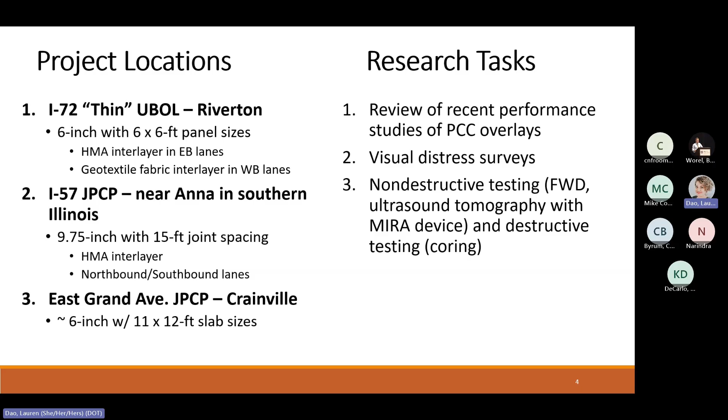Design details for this project: the original pavement was an 8-inch continuously reinforced concrete pavement, built in 1976, so it's 50 years old now. It was constructed with D-cracking susceptible coarse aggregates. D-cracking is a freeze-thaw distress that afflicted many of our early concrete pavements in Illinois.

It had an HMA overlay in 1998, which we milled off prior to doing this new PCC overlay. The overlay itself is an unbonded 6-inch fiber reinforced concrete overlay, using 4 to 5 pounds of synthetic macrofibers. The joint spacing was 6 feet by 6 feet. The eastbound had 1.25 inches of hot mix asphalt interlayer, and the westbound had a geotextile fabric interlayer.

There are no dowels in this pavement since it's only 6 inches thick, making it a little hard to put dowels in. So we're relying on aggregate interlock and maybe a little bit of contribution from the fibers for load transfer.

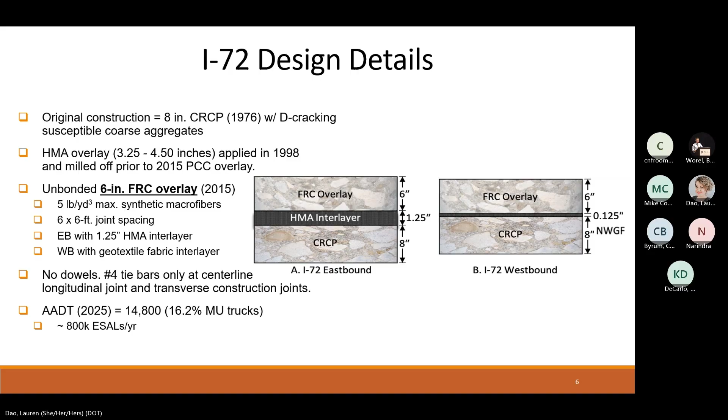A few slides here on the construction sequence for this project. In pre-stage 1, we had to replace the inside shoulder, which was only 6 feet wide and 11 inches thick. For the staging, that shoulder was going to be carrying traffic, so since it was in poor condition, we needed to rebuild and replace that material.

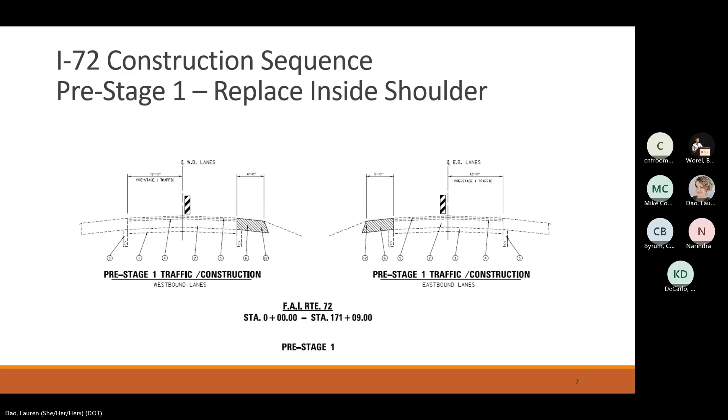For stage 1, we were working the driving lane and the outside shoulder, so traffic was driving in a portion of the passing lane and the inside shoulder. The contractor chose to do the driving lane and the outside shoulder in one operation. If we had done the driving lane and outside shoulder as two separate paving operations, we would have had to use tie bars, since we wouldn't have had the benefit of aggregate interlock - it would have been just a smooth joint. Since that's a solid joint, you kind of count on aggregate interlock once a crack forms.

We did a little bit of repair in the outside shoulder, milling deeper than just the 3 1/4 inch overlay. We removed all the overlay, and the outside shoulder went a little bit deeper to repair some poor material in that area.

After the driving lane and outside shoulder were all done, we came back and paved the passing lane and the inside shoulder again in one operation, just a solid longitudinal joint there with no bars.

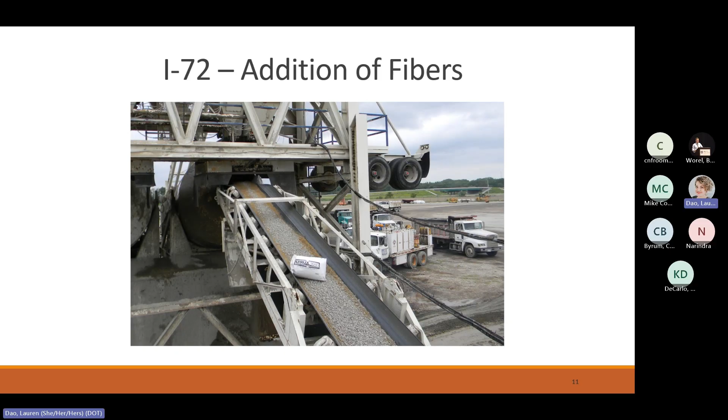Just a photo of the fiber reinforced concrete - you can kind of see the little fibers sticking up in there. That's on the asphalt interlayer material.

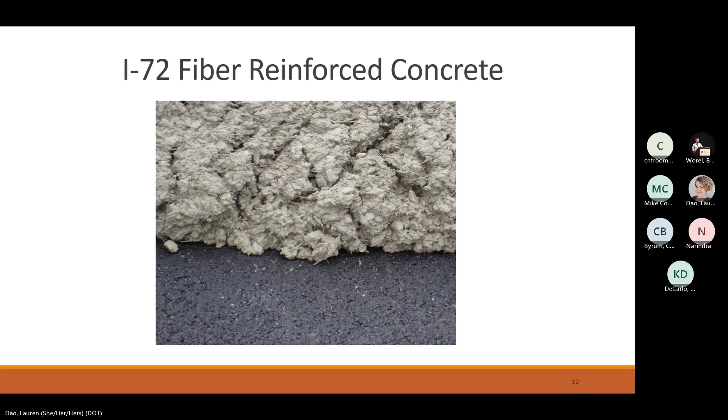At first we had them put it down with washers and nails to try and keep it down. Very shortly they determined that wasn't really going to work because you couldn't keep it tight and it would wrinkle up. Trucks backing material to the paver, and anytime they turn or brake, it would cause the fabric to shift and move around. I think it worked out better once they started using tack coat to secure the fabric.

But still, one of the other things we could do with the asphalt interlayer was correct some cross slope issues that we had. So it's easier material to work with for the contractor, and for design, it was a little bit better for both the district and the contractor.

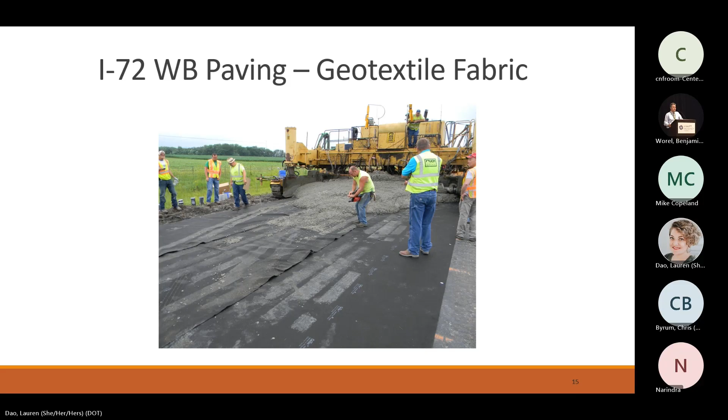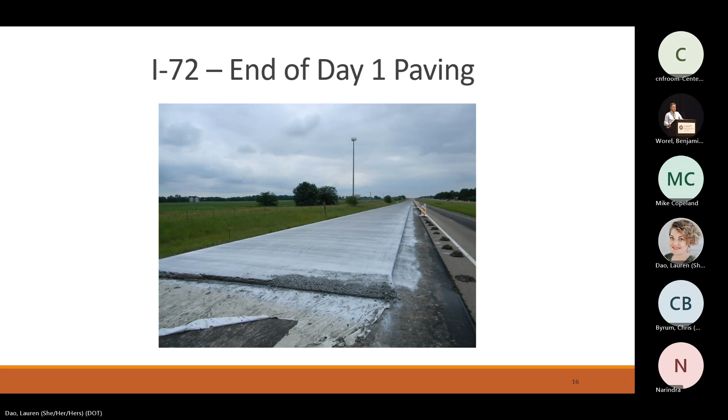The eastbound has some longitudinal cracking that the westbound doesn't have, so that's why it's a little bit lower CRS. I think that one's 7.8, and the other side is 8.1, but those are still in the excellent category for our CRS ranges.

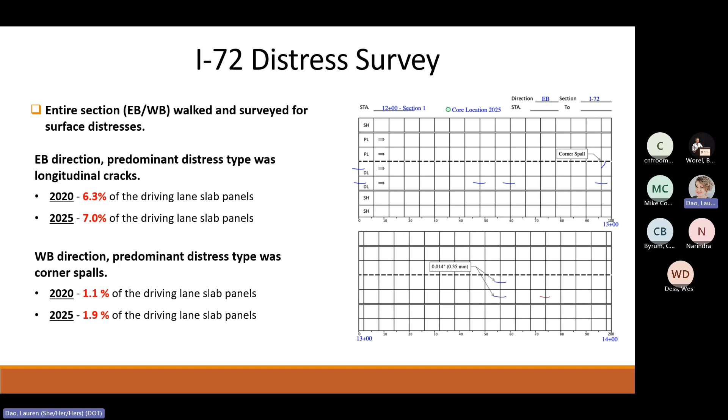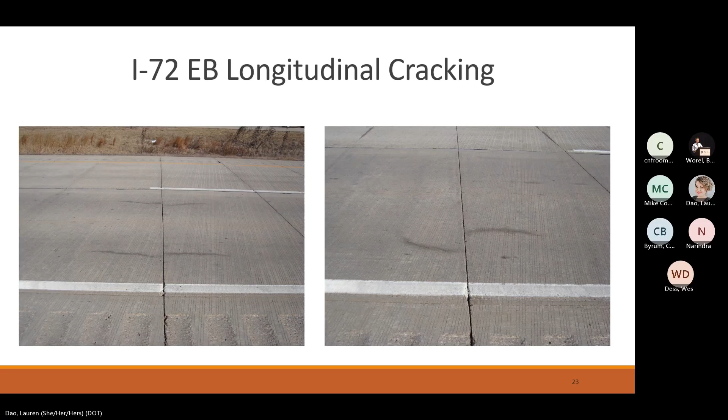So we took cores mid-panel. The HMA was bonded to the concrete in good condition. We took cores 6 inches from the joint. The HMA was bonded and in great condition. Then when we took cores over the joint, particular joints that had that longitudinal crack, you could see that there was a little bit of erosion and stripping in the HMA interlayer, debonding. So you lose just enough support there, causing just enough deflection to sort of initiate that longitudinal crack.

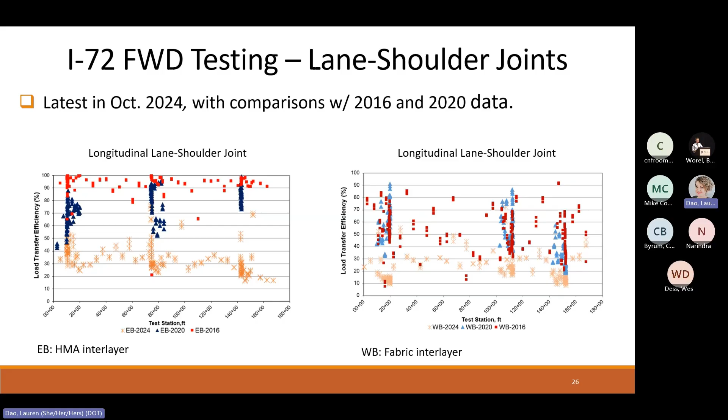Ultrasound tomography with the MIRA device. This is a little shoebox-sized device that we can use to shoot a signal down into the pavement and see how it bounces back. On the westbound, with the fabric, there's kind of a cleaner break between the materials, so you get a stronger signal there at 150, which is a 6-inch thickness. On the side of the asphalt interlayer, the concrete is bonded to that layer, so it gets a little bit fuzzy as far as the reflections coming back, being read by the MIRA device.

This is just showing you can see a much more clear signal on the side of the fabric there on the top than you do on the side of the HMA layer that we're showing on the bottom.

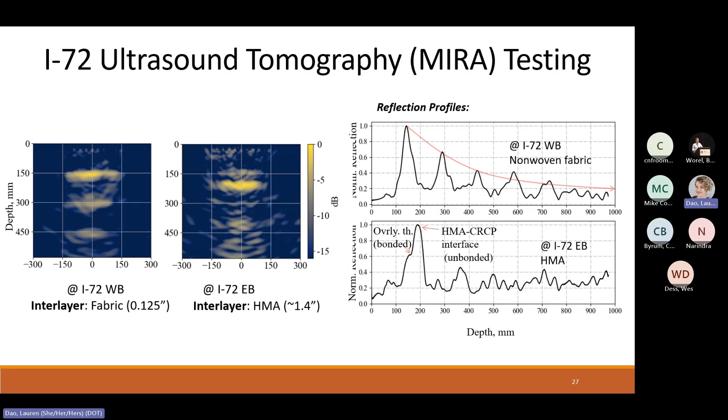We did do a few patches in 2024. The location on the left is a transition panel from asphalt to concrete. That panel cracked within a year after construction. The nice thing with the fiber reinforced concrete is that sometimes even when you do have cracks, the fibers keep the cracks tightly together, so it wasn't a huge performance problem. We kind of let it go for several years before we patched it.

If they had asked me, I would have told them they could have just patched the 6x6 concrete, but they did a full depth patch there, so it's like 6 inches deep—like an airport runway patch in that location. They didn't even bother reestablishing the joint in the center line; they just did this one rectangular patch, but it's so thick it's still performing fine. The one on the right, those are two consecutive panels on the right wheel path. Again, they didn't reestablish the joint in the middle of it, but it's still performing.

There are 3 patch locations in the eastbound and 1 in the westbound. After 11 years, so really not much going on there.

So overall observations, both the eastbound and westbound are performing well after 10 plus years now. It was designed for 15 years. We typically expect 15 years out of an HMA overlay, and we designed this for 15 years, but it's going to go far beyond that.

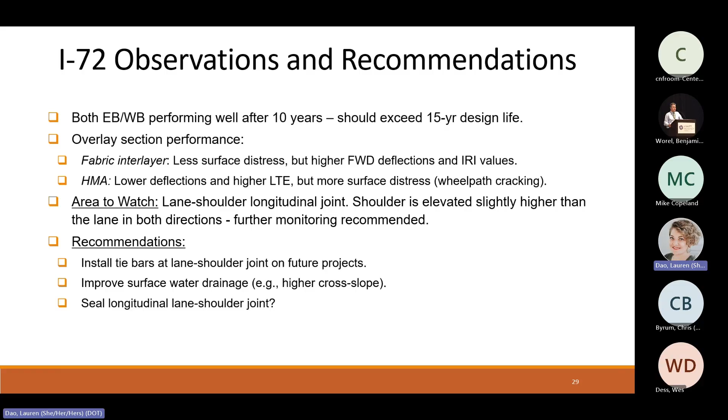Second project, I-57 design and performance. This would be a more conventional unbonded overlay design, so it's not the thinner slabs like we did on I-72. This has more thickness, which you can see on the typical jointed concrete pavement.

It's down in Johnson and Union counties in the southern part of the state. The original pavement was a 10-inch jointed reinforced pavement from the early 60s with 100-foot joint spacing.

Almost more of a CRC state for the interstates, only two-thirds, but some of the pavement, about 30% or so, was jointed reinforced back in the early years. So those are the ones basically every 100 feet—that's the problem because those joints would always fail.

Some of that stuff got rubblized, but then we did concrete overlays on this particular project. So that was reconstruction in 2016, a 9 3/4 inch unbonded JPCP overlay.

This project had one HMA overlay at the time of construction. So instead of completely removing and replacing that, they kind of used that material as the interlayer. They just did a profile mill, took off 1.5 inches, put back 1.5 inches of surface to serve as the interlayer on that project.

Project limits for north and south were a little different—longer in the southbound than in the northbound. Then just in the last couple of years, they came back and filled in the northbound section to match the south. They didn't have the money to do the entire project, so I had to break it up.

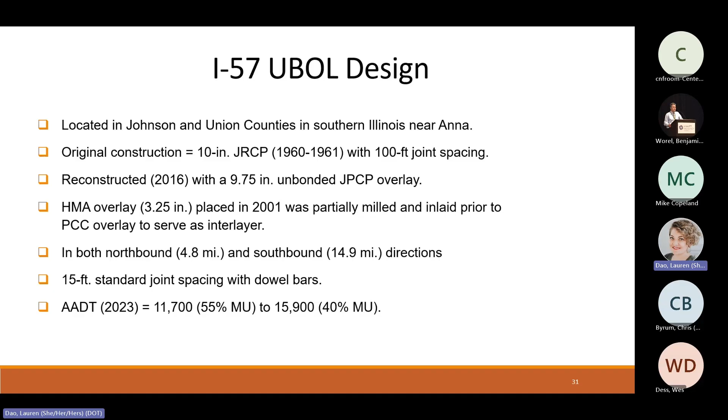CRS trend for this project: on the left, you start out with the condition of the HMA overlay. It got down to 4.5 or so, which would be in the poor condition, especially for an interstate pavement. They put the PCC overlay on in 2016, and it's been pretty steady since then.

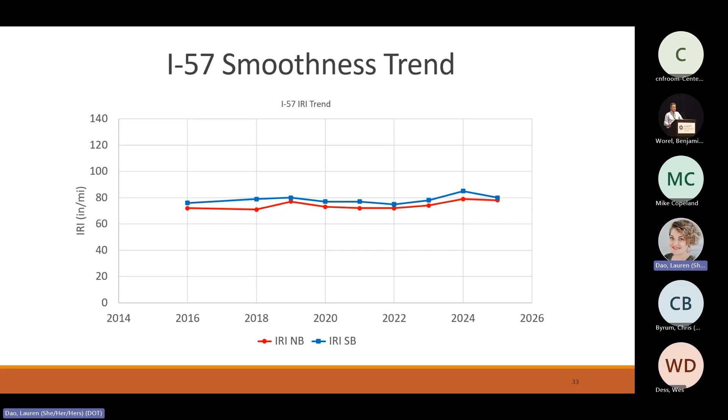The IRI numbers for this one—smoothness is not quite as good as it was for I-72, but it's also been pretty steady over the years, not getting worse over time so far.

As far as this research study, since they were doing work on the northbound lanes, we couldn't close down any of the southbound lanes to get out and do FWD testing or coring or any of that work. We're going to try and pick up that portion of the study this summer. So the work is done for now.

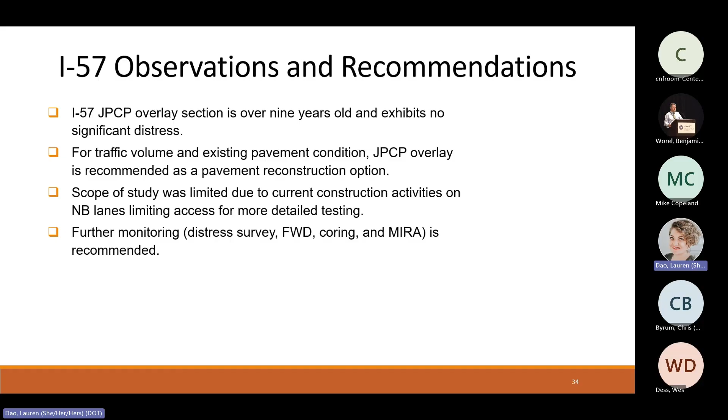And then the last project is East Grand Avenue, in the town of Greenville in southern Illinois. This one was constructed in 2019. It was a local project, a city project, not a state project.

The original concrete pavement was 16 feet wide. It had been widened with bituminous and overlaid to about 20 feet. The plans were to come back and put some additional widening, plus an additional 4 or 5 inches of asphalt, to make it a more conventional 11-foot wide city street.

The contractor submitted a value engineering proposal to us to just swap the HMA overlay for a concrete overlay, for the same price. We don't normally do that, but we agreed to take it on as an experimental project because we thought it would work. It just wasn't what we had originally intended.

So it's about 6 inches thick. The 2 lanes are now 11 feet wide each. Joint spacing is 12 feet on this one. They incorporated a concrete gutter along the edges.

Total length is only about a half-mile section. ADT is 3250, mostly passenger vehicles, buses, garbage trucks, that kind of thing, so not many heavy trucks. Last year we walked the entire section and did some air testing on that as well.

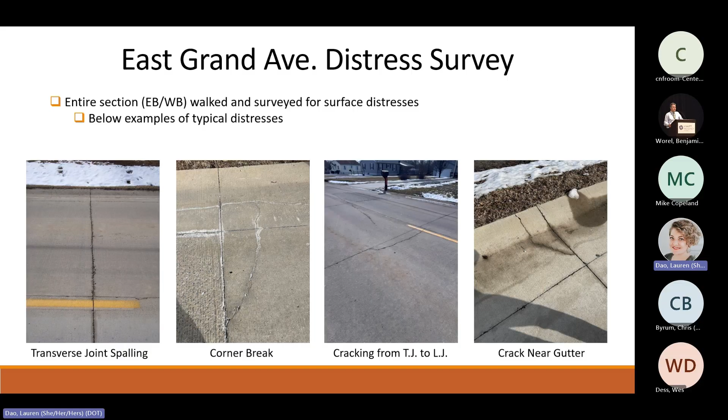So there's the photo—the section is actually a very nice section now. Going to the neighborhood just to the west, it's still the narrow asphalt pavement, 20 feet wide, so it's an improvement for the homeowners in that neighborhood.

Like I said, no design and performance issues so far. It's 6-7 years old now, just a few cracked panels there. Like I mentioned, those are most likely construction defects, late sawing or something that caused those.

For the unbonded concrete overlays, like on 72, the 6-foot by 6-foot by 6 inch design worked well. That's sort of what I would call a moderate traffic section of our interstate system—not super heavy, but not really light.

Would we want to push it much further traffic-wise? I'm not sure, we need to do a little investigation to see how many more trucks would be willing to put on something like that. Once you get above a certain thickness—we're at 6 inches here, once you get to 7 or 8—then you're more into a conventional concrete pavement. 6 inches and below is kind of where we'd be for this 6x6 design.

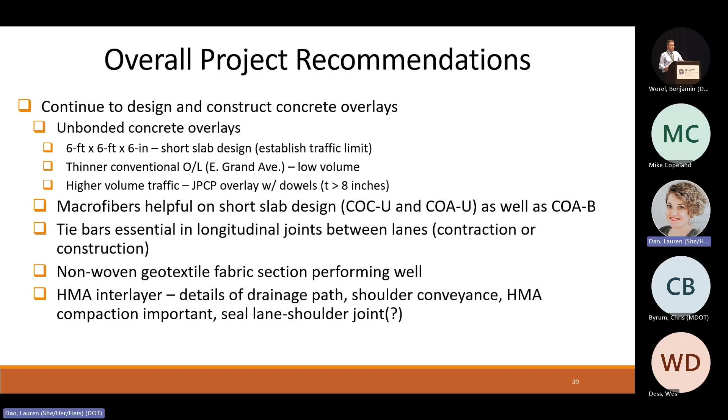Just a list here of some of the various concrete overlay projects we've done. We've done quite a few over the years. There's been some work with fibers, and we built some sections, both mainline and low volume road, in the first construction phase. Some of these projects I was a panel member on, some not.

So the one on test section repairs, performance, and engineering—the diamond grinding—that one's done now. Oh okay, so a couple of these are ongoing. I think the bottom ones are finished and the top ones are still ongoing.

And Tom kind of pushed the limits on thickness on some of them, so we had some 3-4 inch sections in 2017. So definitely still checking out the performance of concrete overlays.

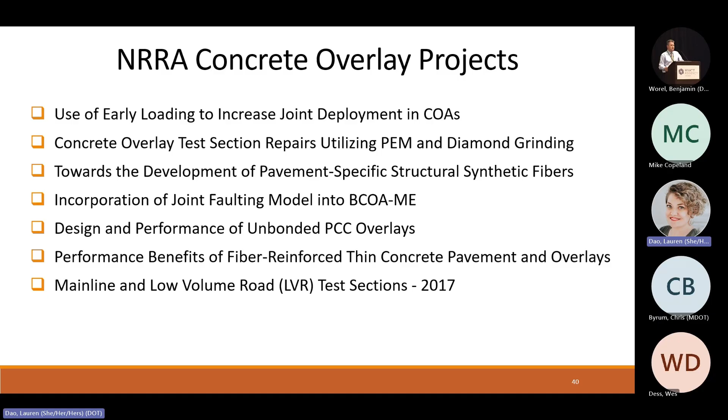So that's all, I'll be glad to take any questions. And again, there's a QR code if you're interested in looking at the report.

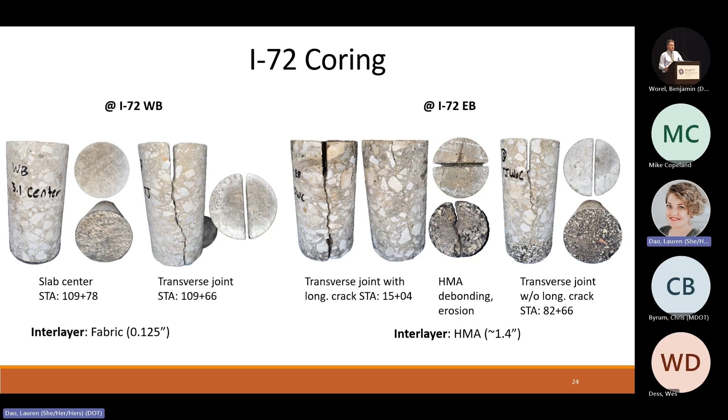Like I showed those pictures where it was bunched up, some construction issues caused the roughness. It was rough from the very beginning, and it was getting a little rougher as time goes on, but I think that could easily be corrected with diamond grinding.

As far as fabric, some of the things we consider is the fact that you have no bond, so some of us think perhaps there's much more curl, and that's going to affect your ride. Also, when doing FWD measurements, you get much higher deflection because the fabric compresses, so that artificially makes your joints not look as good.

So yeah, my name is Julio, I'm happy to be here. I'm going to talk a little bit more about concrete, a little bit of science, and a little studies that we have done over here. The first part is with the fundamentals of the systems.

Then we will go on the discussion of what we have done in the past and recently, and then what's coming ahead. Calcium sulfoaluminate cement was actually invented in the 1960s by Professor Alexander Klein, but it was originally intended for shrinkage compensating cement. It was not until the 1970s that they tweaked it to create a fast setting cement.

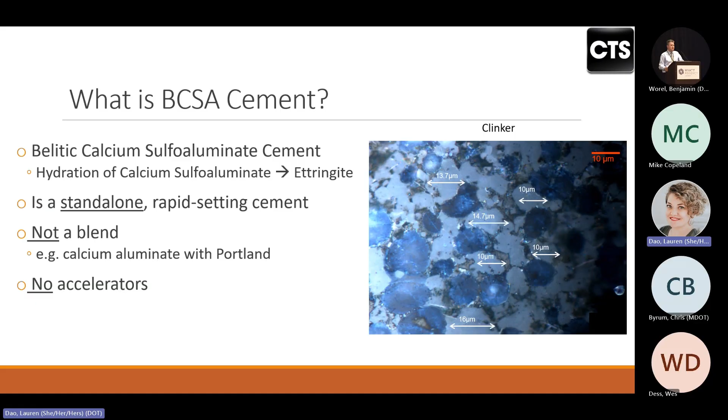The main characteristic is this is a standalone cement. This is not Portland. There's no calcium aluminate in it. There's no mineral additives, no chemicals, no anything. It's a cement that by nature is fast setting. Depending on how we play with the raw materials, we fall into a different category of CSA cement. Today we are talking about the Belitic calcium sulfoaluminate, the blue one, and that's the fast setting cement.

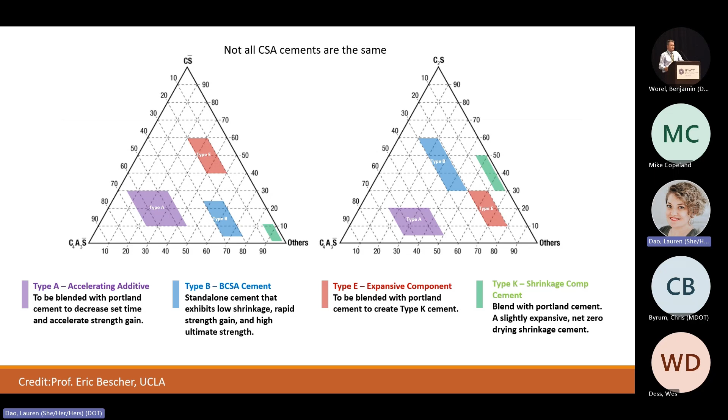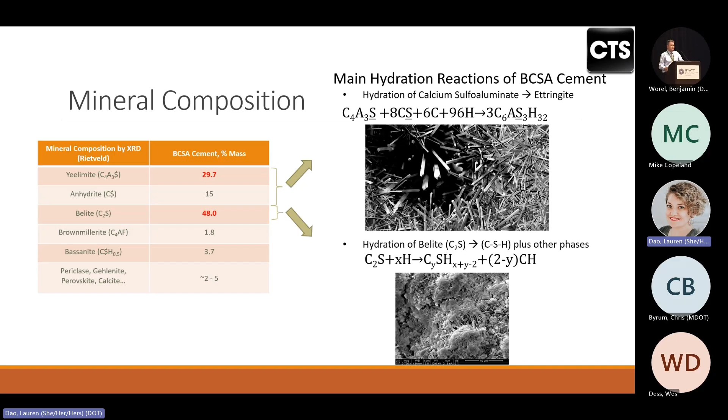The yeelimite hydrates when it touches the water, hydrating into ettringite. It's that needle-like structure that grows really fast as soon as it touches the water, and it interlocks. That's what creates the matrix structure to give us strength at an early age. Then the belite, in small quantities and over a longer term, is what develops the strength at a later age.

There are five characteristics about rapid set or BCSA cement. The first is higher strength - depending on how the mix design is done, we can achieve 3,000 PSI as fast as an hour and a half to two hours.

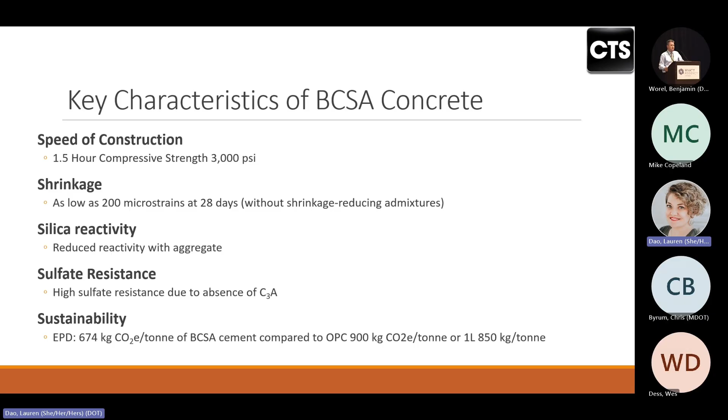The first section of pavement was built in 1963 in California. Sections of those two projects are still in service, not all of it. But it was not until 1994 with the Northridge earthquake that rapid strength concrete in California took off. Two overpasses collapsed, Caltrans needed to build the access ramps, and they relied on the research done at that time, deciding to use BCSA cement.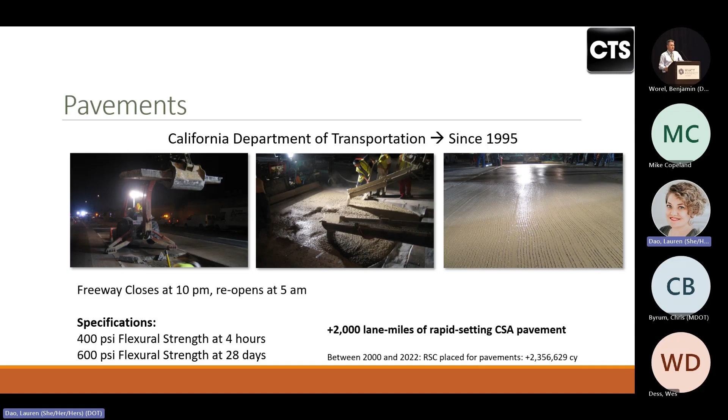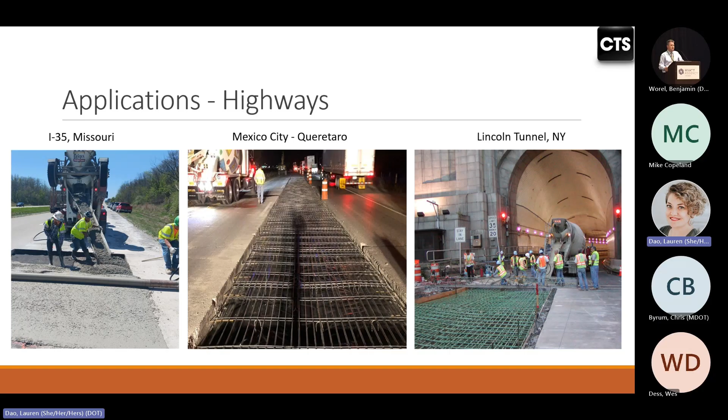They opened the project 74 days ahead of schedule, and from there it has not stopped. Since 1994, 95, there's more than 2,000 lane miles of BCSA cement in California. It's definitely the state that uses the most, but there are also many other states that use it. Main applications are highways - I purposely picked those three pictures because they show a slab replacement, longer stretches, different types of pavements, heavily reinforced, but all three were produced with ready mix application, and we are going to talk about that in a minute.

Bridges, bridge decks are pretty common. This is a material that is less permeable, so it's really good for corrosion resistance. We do a lot of bridges. The third main application is airports - we do a lot of airports. This material is used when you need speed. If you don't need the speed and you can afford closing your pavement for multiple days, go use Portland cement.

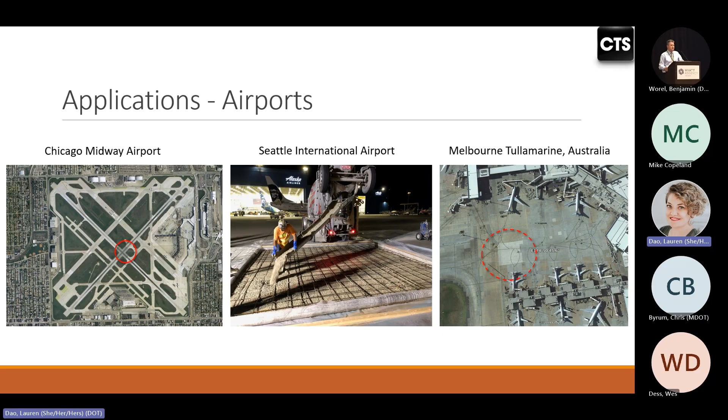How do we deliver concrete on-site? Two methods: volumetric truck - most people think that's the only way - but ready mix is pretty common. Nowadays, about 65% of projects go volumetric and 35% go ready mix, especially the larger volume projects. Both methods have their pros and cons. The reliability, consistency, and efficiency of ready mix are the highlights, but the versatility to adjust, stop and go in volumetric makes it desirable for contractors. Both methods are used.

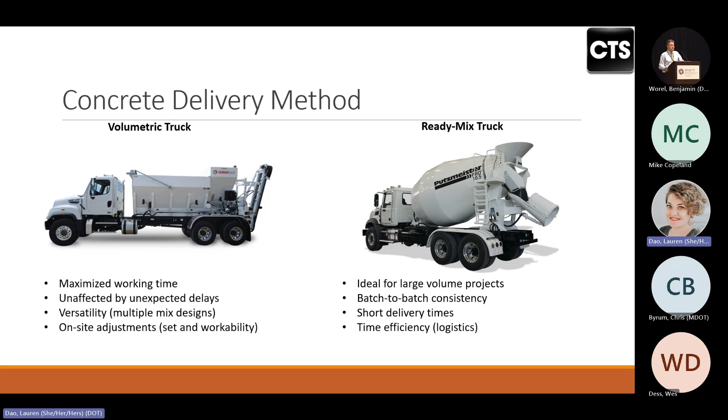Okay, that's kind of the fundamentals, in case somebody wants to go back and review the slides.

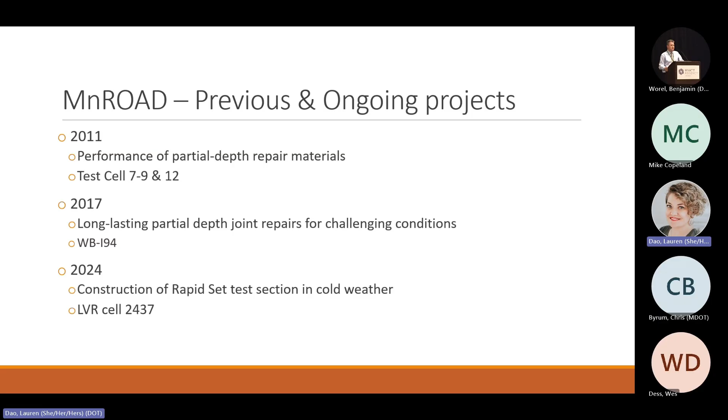Now we're going to get into what we have done on MnROAD, basically three projects over the last decade or so. The first one in 2011, then 2017, and the most recent one I was heavily involved in, 2024. In the first project, sections built in 1993 started to have severe distresses in the joints, and in order to keep those pavements in service, MnROAD was obligated to do some repair in those joints, and they decided to do a partial depth repair program.

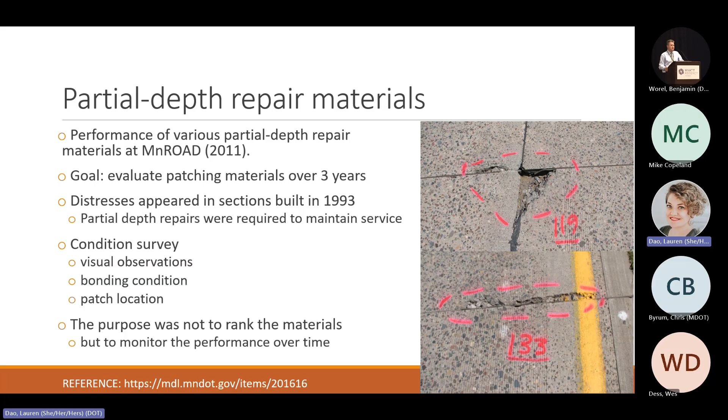I don't think the objective was to rank the different products, but just to understand what was in the market and how they perform. Two pictures show how the pavement was looking at the centerline joint and a transverse joint. The system was ranked from 0 to 5, where 5 was excellent condition, reviewed every year for 3 years, or 0 meant completely failed.

We, or CTS, used CSA cement through this product, which is a DOT repair mix. It's a high performance structural repair product, mostly CSA cement with some polymers and sand that improve permeability and durability. It can be used from half an inch to 24 inches if extended with big gravel. Really high early strengths, 2,500 PSI as quick as 1 hour, easily hitting 7,000 PSI at 24 hours, with really good resistance to scaling and freeze-thaw.

That's an example I extracted from the report. Joint 132 — those are four pictures from four different evaluations that were done. It performed really well; most of the joints got a score of 3 or 4. There are a couple that got 1 or 2, but most got a 4.

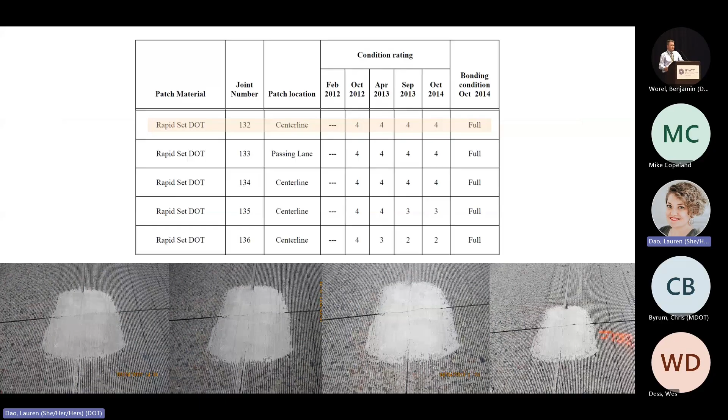In those pictures, I don't think you guys can see it, but there are still tiny cracks. Most of the cracks are in the direction of the joints. Very likely the joints were not honored, and of course the crack is there, but it still performed really well.

Then the second project, 2017, on the westbound of I-94. This was a more structurally intended project, sections that were built in 1993. All the distresses were manually documented.

The idea was they didn't traffic it during the winter, right? Only during the summer. This is a layout of the distress in each of the 15 sections. And we participated again with DOT, a repair mix.

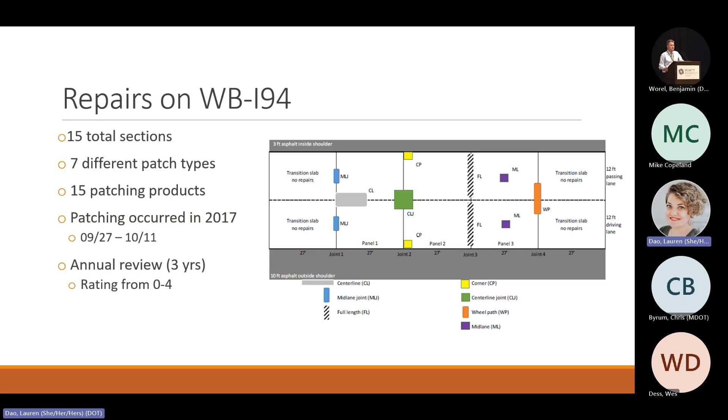It was done around fall of 2017, and evaluated every year for 3 years. Again it was ranked from 0 to 4, where 4 was perfect condition and 0 meant it failed at some point in the process and had to be replaced.

The same product was used, with a couple of variations — with fibers and no fibers — but it's the same system of CSA cement.

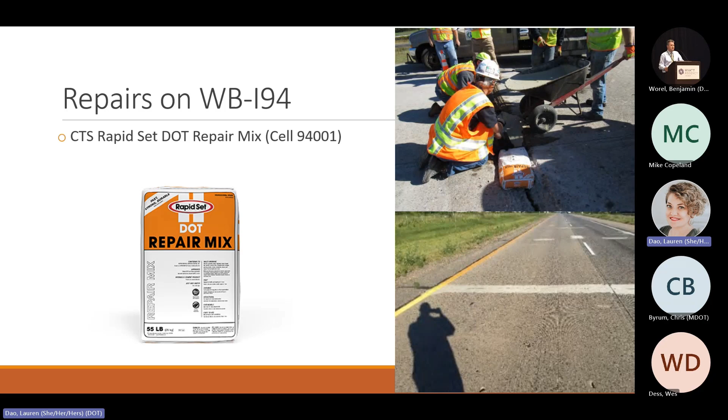We can see in the picture on the right side — not intended to compare versus other products — just the final score after 3 years, I believe around 3.7 to 3.5. It performed really well after 3 years in service, and it was categorized as a long-lasting patching repair material, so we were happy.

This pavement was reconstructed in 2025, and Tom was kind enough to share some pictures taken in 2025 of the same section, the same patches built in 2017. From the set of pictures I got, most of the patches are in really good condition.

Some of them, like in the middle picture, didn't do well and had to be patched with something else at some point in the process, but I'm really happy to see the durability of the material. The last picture shows fibers.

I don't think I have time to go into a lot of detail, but one of the myths is that there's more corrosion with CSA cements, and that's actually not true — it's a more dense material. So the fibers, according to the report, that were embedded in the concrete and not exposed to air and water, showed no corrosion at all.

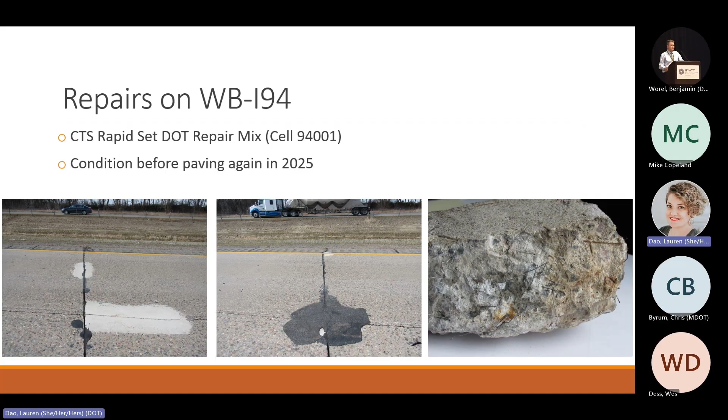And then the third project is the low volume cell 2437. In fall of 2024, MnROAD had this project in which they used multiple low carbon cement alternatives to test it, right?

We were not selected initially, mainly because we cannot place BCSA cement, rapid set cement, to a pavement.

But around, I don't know, I remember like November 10, November 11, we got a call that there was a situation in which one cell was already open, and due to the change of weather, it became really cold. They couldn't place whatever they were intended to place, asking what if we could do something. And oh, by the way, it needed to be done before Thanksgiving. So literally like 12, 13 days.

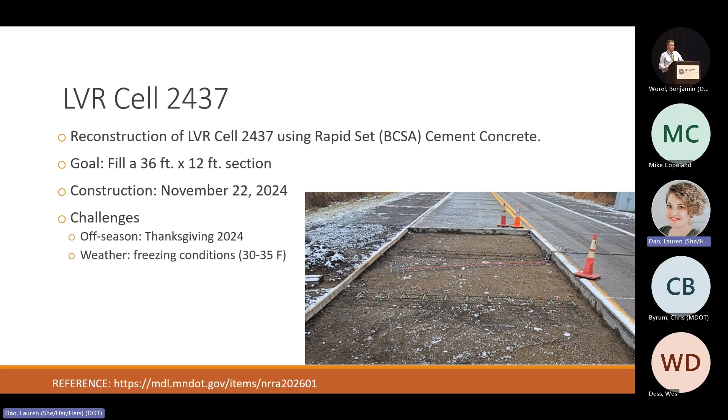So the challenge was not only Thanksgiving of 2024, the freezing temperatures that were already over here, but also none of the contractors and producers that traditionally use rapid set in Minnesota were available, or they were already shut down for the season, or they were working in another southern state trying to finish before the weather chased them. So we had to find a producer and a contractor that had never worked with rapid set before.

We developed a mix design with the targets that we were asked for - how it needed to be placed and needed to reach a strength to be able to have it in service for the winter. SJB Concrete was the producer, and North Country Concrete was the contractor.

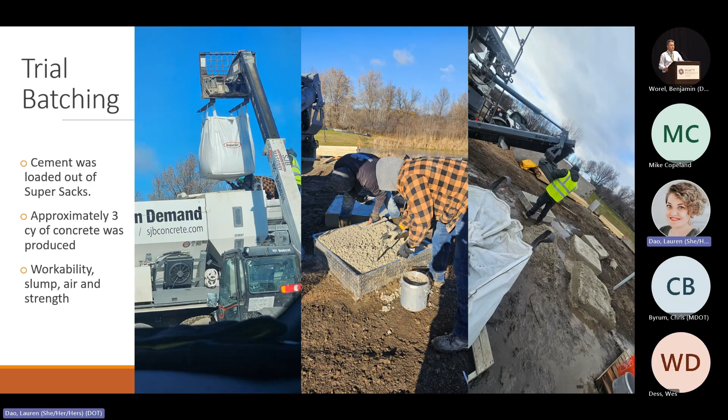We flew in, we helped the producer, we helped him calibrate the material, we helped him calibrate the mix design. We did multiple trial batching. That trial batching by itself is a must in any pavement project, but we definitely did a lot of that. And we made sure that we had a good concrete. Then the next day we met with the contractor to start.

Every new contractor that does concrete, they know what they are doing, right? They are super smart, they always know what they are doing. Oh yeah, we can do it, it's easy, right? And then when they had to assign more people because they were falling behind on how the material was setting, it's like, oh, what is this, right? But they learned on the spot. They had no option. Their ego came down really fast.

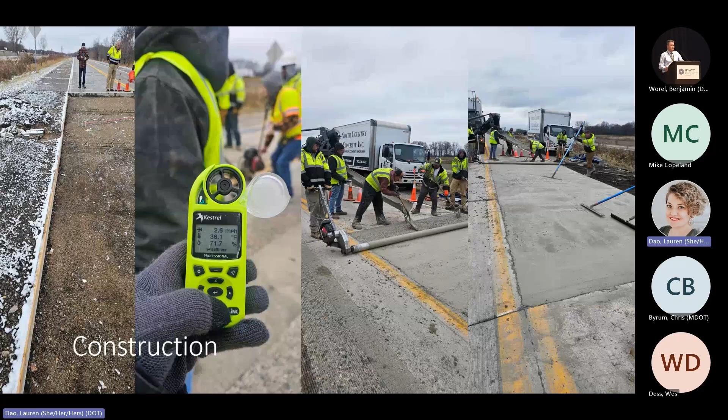The left picture is how we found this section the day before, the afternoon before, a little bit of snow. The second picture shows the weather conditions during placing, and then the other two show construction. In the last one, we can see how we are roller screeding the last end. The finishing crew is already halfway finishing it, right? And then in these ones, we can see the finishing crew is at one end, and then the tining is already halfway. That's how fast it was going.

We had to be very aggressive with the retarder, because otherwise it would not reach the temperature and strength that we needed. Right away, curing compound. As soon as it became not sticky, curing blankets. And even when we did the saw cuts, it's not that we opened the entire surface - we just opened enough to do the saw cuts and covered it again.

You guys can see the results in the report that Dr. Bernard wrote - a very extensive and good report. But we were really happy with the fresh properties. I mean, 5.5 inches slump. It was a really workable mix. The crew didn't struggle. Air content of 7%, where the target was 6 or 6.5.

And then temperature of 63 - that's key, right? Because that's what the material needed. Weather was at 33, 34 degrees, and we discharged at 63. Hot water was used. We conditioned the truck inside a warehouse the night before. Therefore, the aggregates were trying to be removed from the outside, but those are common strategies that are used when the weather requires it.

The 4-hour compressive strength was 3,800 psi, which we were really happy to get at those weather conditions, and the same with the flexural. The flexural trend has a dip at 28 days. I wanted to be honest and put it.

That's a phenomenon that we see more often than what we would like. It's not a material issue, it's more like a manipulation, curing of the beams at a later age - usually they are not treated the same way. And that's why we always do compressive strengths along with the beams, because the compressive strength at least shows the behavior of the material.

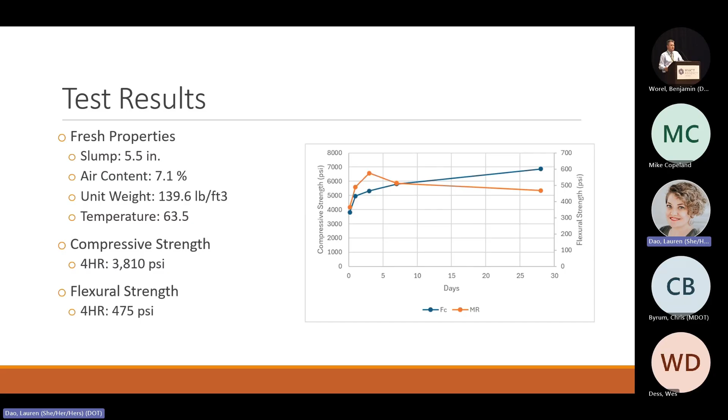We didn't run all these tests ourselves. Minnesota hired, I believe, AET or something like that to run all this testing.

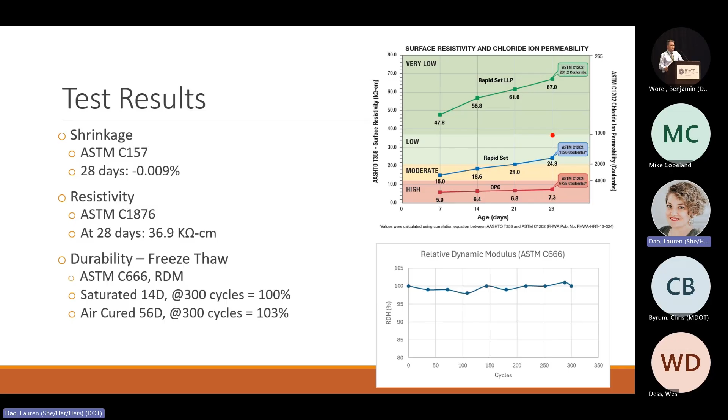So very pleased how in a matter of 12 days we were able to put together a mix design, a producer, a contractor, and build a section that's still in place, and it will be there for as many years as MnROAD needed. Okay, but what's next?

What are the next steps? Where do we want to go? Where can this material go? It's basically innovating with BCSA as an additive.

We all know about PLC - OPC with extra limestone. Yes, lower CO2 emissions, but we can have a big discussion about reliability, one-to-one comparisons, strength issues, etc. LC3 is another option, another type of OPC with modern modifications to even further lower CO2 emissions. But what about performance? I mean, 56 days, etc., and all that variability and issues we see in the field.

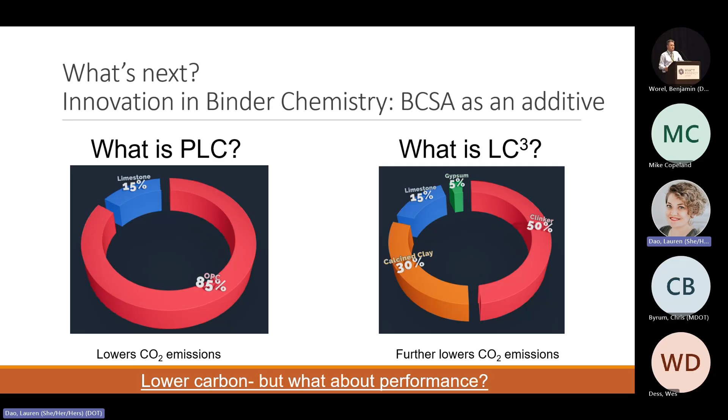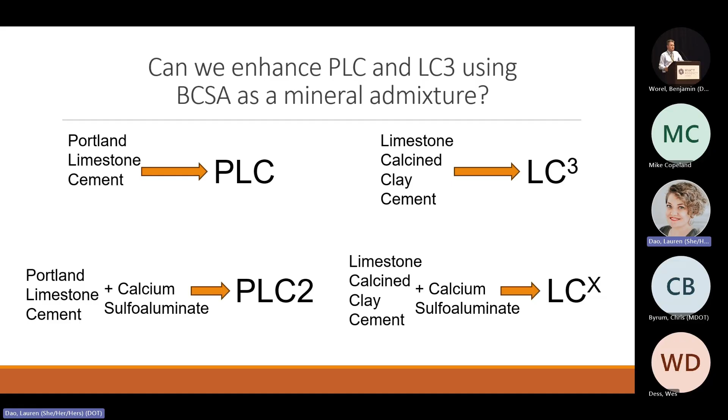So can we enhance PLC, LC3, or alternative OPC materials with BCSA as a mineral admixture? We believe we can, and this isn't just a belief - it's a process that's been going on for more than 4 years now. There are multiple publications you guys can access; the links are there, and there's a few more. Multiple publications in the last 4 years from us and multiple research teams around the country, especially UCLA, have put effort into how we can improve alternative cements.

The principle is basic and easy to understand - it's about changing the balance, the chemical reaction. So we start from the cement chemistry, how it's affected, using XRD, XRF, TGA, calorimetry, and all this, to see how the sulfate balances and the carbo-aluminates in the mixes change by adding BCSA.

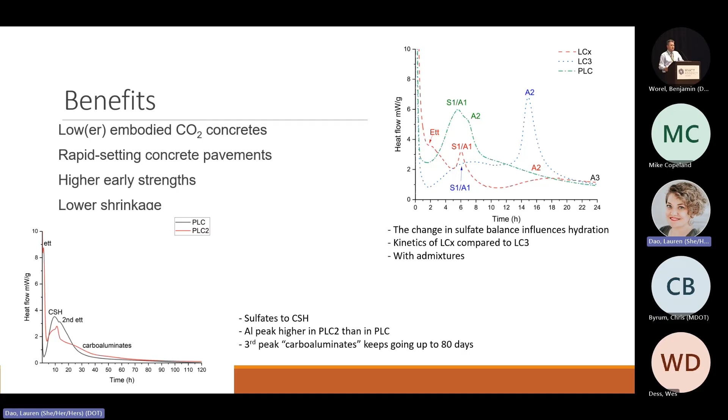Next step was mortar, and most of this work was done by Elisabeth at UCLA for her doctoral dissertation. She found that PLC and LC3 don't have any early age strength, but as soon as BCSA is added in certain percentages, early age strength is achieved.

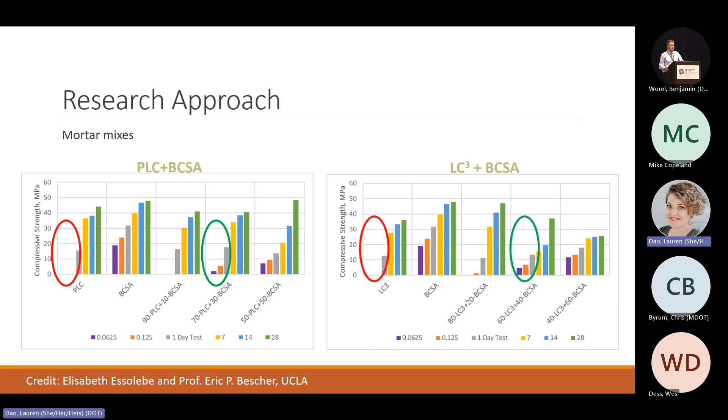We went to concrete, and now we were able to bring these systems to compare them with OPC Type 3 or even BCSA by itself. Now we bring them up from being far from that performance to at least put them in the same arena.

And then the differences are massive, because BCSA is not only really low carbon, but it achieves really high strength and really good performance at an early age. In order to achieve the same with alternative cements or OPC, the amount of additives and cement content in a cubic yard will increase, and by the time you divide that by the strength at 4 hours, which is probably not that much still, the difference is massive.

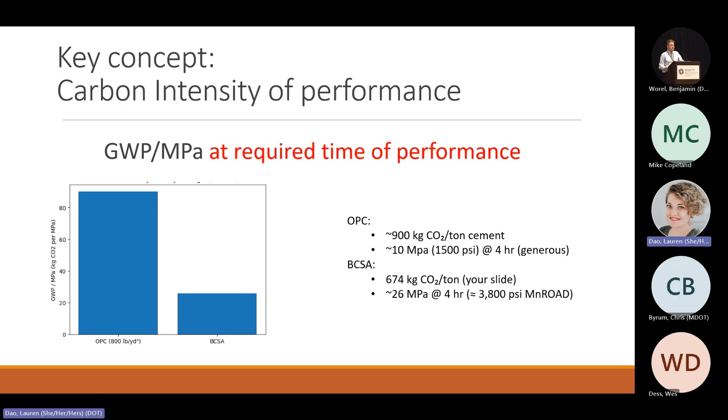Okay, the next step was pilot projects. We built one in Southern California in conjunction with the Caltrans district over there, and then another one at UC Davis Pavement Research Center, part of the Lab to Slab initiative they have with Caltrans. Then one at Oregon State University with Jason Ideker - three main pilot projects that have been in service anywhere between 6 months and almost 2 years now, being monitored and categorized.

Precast application is something we're looking into, so there are a few pilot projects in the Northwest, Mexico, and even Abu Dhabi with NYU.

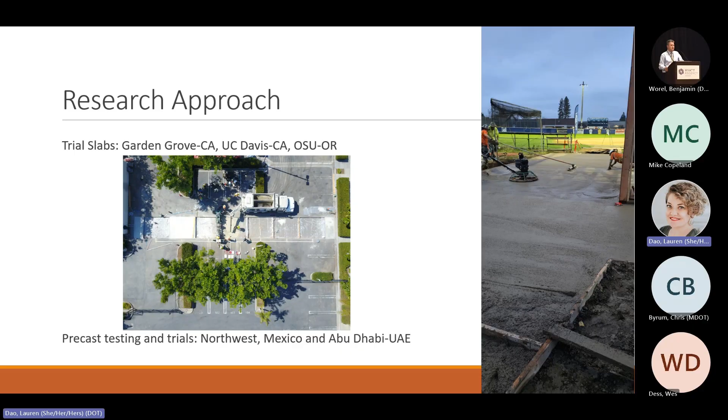This is a picture of the construction of the two cells at UC Davis. One is the PLC2, which we call PLC plus belite calcium sulfoaluminate, and the LCX, which is the LC3 with BCSA. Normal pavement performs great, but we just have the early age performance. So what are we looking for?

Just to conclude, it's an opportunity to bring low carbon alternative systems based on BCSA to MnROAD, and compare the performance with Caltrans and UC Davis test sections.

I live in California, but I'm not originally from California. They said they have the most severe weather for concrete pavements. Minnesota also has really harsh conditions for concrete pavements.

So the idea to compare a thin section at MnROAD is very attractive and would provide that data to DOTs. There are already a few DOTs, Wisconsin, Oregon, Washington, California, highly interested in these systems. But by participating in something like MnROAD, the outreach will be a lot more.

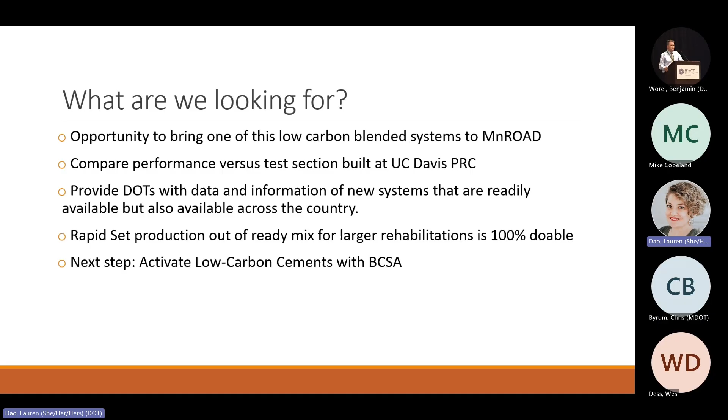Rapid Set production out of ready mix is 100% doable, no questions about it. That's my last slide. CTS has been producing belite CSA since the 1970s. In the field of low carbon cement, it's the only low carbon cement categorized as TRL9, and that's massive. It's the only cement that provides high early strength, low shrinkage, and proven durability.

So if there's any questions, I will be happy to take them.

Okay, I'm going to start off with maybe a little bit of awkwardness. You didn't really cover the fact that when we did that test on the low volume road with their mixture, there were some funky testing results that came out and a little bit of controversy. Do you want to cover that, or should Bernard cover that? I'll probably have Bernard cover that. I believe it was the freeze-thaw testing, is that the one, right? The one where we requested a different curing?

This was very interesting, that we sometimes apply standard testing to some of these materials that may not be suitable. Yeah, correct. And just before Bernard jumps in, we did a really good presentation on HCI this past spring, and that's a challenge we face, we meaning BCSA.

BCSA is a C1600 cement, it's not a C150. So all the tests are designed per Portland cement, and we believe, and we have tested enough, that a lot of these tests should not apply the same way, or should not be done the same way for alternatives and low carbon cements. And not only BCSA, alternative cement itself, these tests weren't developed for that.

All right, our next presentation is going to be a renewal one. We're going to have a shared team here from some colleagues at the Office of Materials and Research. We have Dr. Ceren Aydin giving the first part, and then Dr. Bernard Izevbekhai for the second part. They're going to be talking about contemporary applications of AI in materials and pavement research, and I kind of want them not to throw too many equations, because I see they changed their titles, so maybe it's been mellowed, thankfully. I really appreciate that. A little bit.

All right, it's almost 4:30. That's the last presentation of today. And I look at the agenda and I saw that this is the 15th presentation of the day. So because of that reason, we really wanted to give you a lot of equations, a lot of theoretical background. Just kidding. We thought, okay, we know that we're going to have a little bit of a tired audience. So let's look at things a little differently.

We have a really fancy presentation name, Contemporary Applications of Artificial Intelligence in Materials and Pavement Research. But what we're basically going to do is showcase how we have been using AI in our workflow, so you can get inspired, or we can have more discussions with you so you can inspire us too. The first part of the presentation will be given by me, I'm Ceren, and later on Dr. Bernard will take over from me.

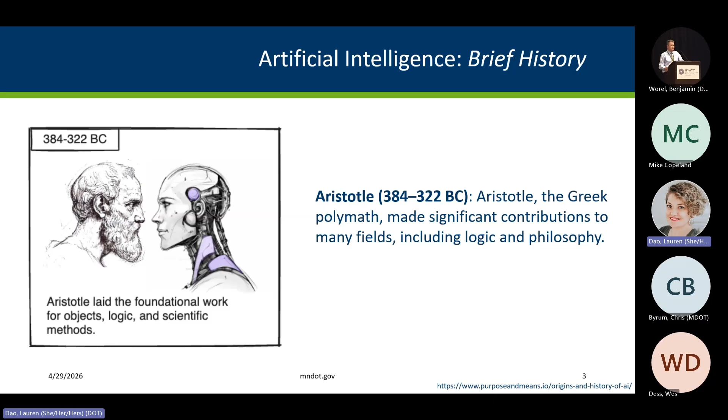And we're going to fast forward. My part of the presentation also will have some fun facts regarding the brief history. When I was doing my research for this presentation, I've seen that there are other websites having little or slightly different timelines than this one, but more or less they're very similar to each other. Just a little disclaimer there.

When you think about them carefully, maybe they're not applicable to what we're doing in civil engineering, but it's fascinating that the questions they pose—whether intellectual beings are good or bad—are still relevant to our age. People still ask: is this going to be bad for Homo sapiens or not? She asked those questions way before us.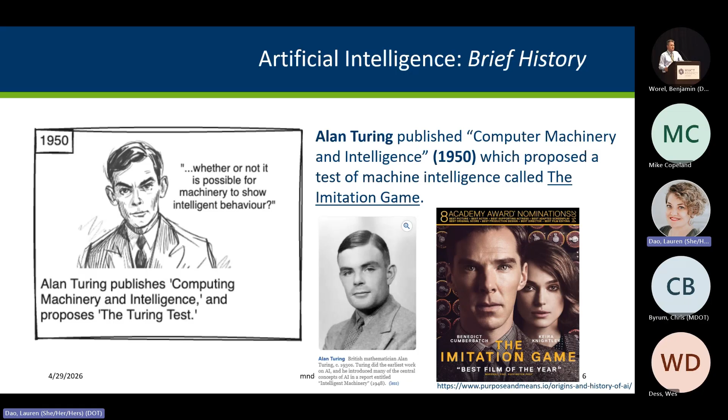He definitely deserves a lot of credit, and he changed the way we look at things moving forward. This surprised me, and I'm curious if it'll surprise you too. I was thinking maybe Copilot or ChatGPT's first GPT was the first large language model we could ask questions and get responses. However, I learned that wasn't the case—the first large language model, a primitive version, was actually developed at MIT in 1964. This is pretty impressive to me.

Also, this AI program, ELIZA, passed the Turing test I just mentioned. The testers were not able to differentiate the responses from machine to human.

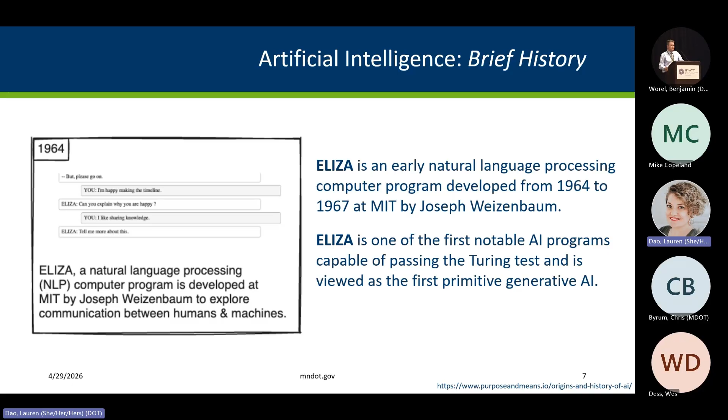Moving forward, AI's development wasn't linear. There's a strange period between the 1970s and late 1980s called the AI winter. People were really excited about AI and made a lot of investments. However, around these years, it became questionable—people grew skeptical about the benefits of AI because they invested and researched it, but weren't getting the benefits they were promised. In fact, a member of the British Science Research Council said that in no part of the field have the discoveries made so far produced the major impact that was promised.

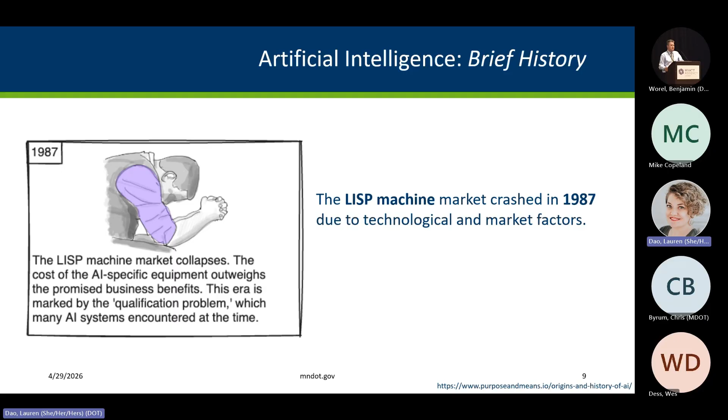Because of this skepticism regarding AI's capabilities, a lot of organizations cut funding—it was almost frozen for that period. Later, the machine market crashed because the cost of these very expensive, fancy software and computer programs outweighed the benefit. People invested but weren't getting the benefit, so they cut the funds. Basically, we call this age the AI winter. Hopefully that makes sense.

But AI rebounded—in 1997 it gained momentum. IBM developed the first chess software, called Deep Blue, which was able to beat the world chess champion Garry Kasparov. This marked a very important milestone because it was the first time in history an algorithm, in a well-defined domain with computational power, was able to outperform human experts. Now one of the questions we ask today is whether it's going to keep happening to our practices as well.

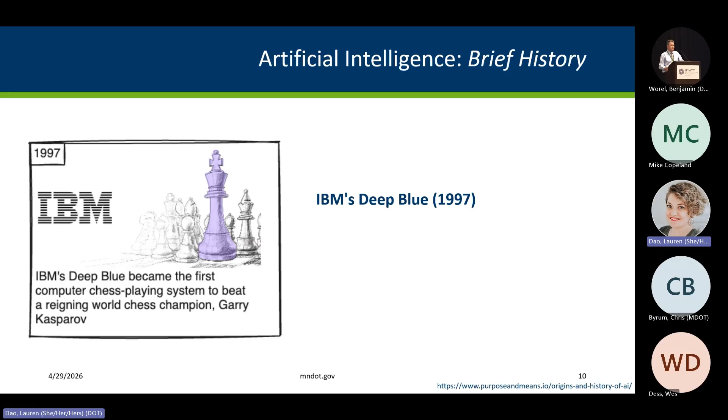But when I look at the date, it's from 2002. So they have been with us for more than 20 years, and I completely did not realize that. And in 2018, the first version of GPT by OpenAI was developed, and the rest is history, right? So now we wake up to something new related to AI every day. It's changing by the hour sometimes. It's really, really difficult to catch up with it.

So when I put these together, I was like, okay, so we've seen a huge history. We started from the Greek philosophers. We went to really high, shiny parts of AI, and then AI winter, and then AI coming back. And then I wanted to ask, what's next for AI? And I thought about it, I thought about it, and I was like, I have no idea.

I don't know what's coming. I don't know if AI experts know. I don't know if AI is gonna gain consciousness and start killing us all. I don't know, maybe it's just gonna die. Maybe it's gonna be something like, maybe we're gonna have a second AI winter. I have no idea. So that's why I decided to ask a different question, which is what we can do with AI, right? Because that's something we can have power over, and that's something we can answer, and that's something we can actually shape.

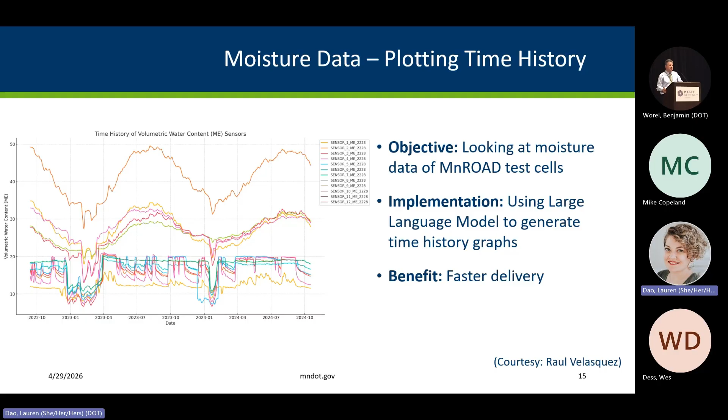This is a great example. If you were to do this analytically, without the assistance of the large language model, it would have taken an extremely long time. And this is where a lot of people fall flat when we get into the statistical representation of things. Now, here's the cumulative distribution function, and we're able to generate things like that very quickly because it helps us see data from a probabilistic perspective. Most of our world is not deterministic; most of it is probabilistic. And being able to use a large language model to convert data, whether continuous or discrete, into probabilistic form, where you can now have either a cumulative or a probability density function — there's a lot you can now do with this, and I will get into that.

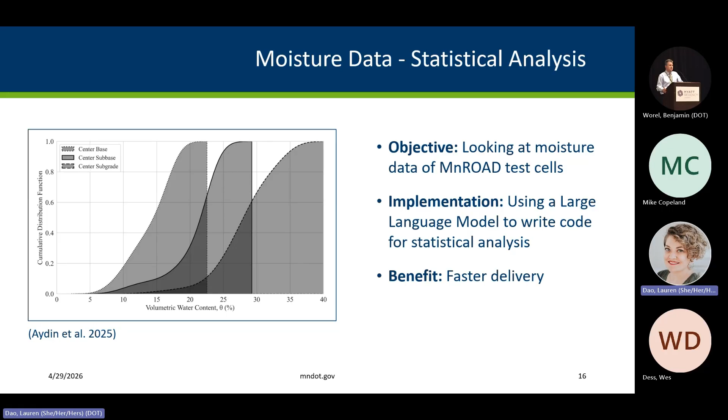We did a paper recently that's being reviewed by Transportation Research Record, the publisher for the Transportation Research Board, who's SAGE. In that paper, we looked at a myriad of temperature measuring infrastructure at MnROAD.

Now, when someone hears about instrumentation at MnROAD, let me put it to you: the cost of a pavement, of a test cell, the actual pavement material, is usually outweighed by the cost of sensors, the cost of installation of the sensors, the cost of monitoring and all that. So sensor installation is a big deal.

So we are optimizing. We're looking at the temperature measuring infrastructure and seeing how we can use optimum resources to still measure temperature and get things like maturity and freeze-thaw cycles out of this data.

In other words, if you have a distribution and another distribution, think of the work done in moving from one distribution to the other. It's like an entropic approach to analyzing different distributions.

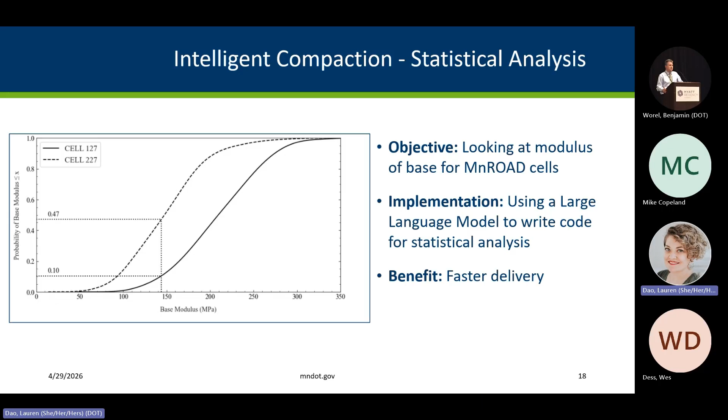If you want to do something like a location allocation solution to a location allocation problem, which is typically called the transport problem—at times called the logistic problem—that logistic problem solution started during the Second World War with Egerváry and Kőnig. That's the reason why they call that solution the Hungarian algorithm; those two guys were Hungarian.

Now, instead of this array, you will have matrices. In order to solve the location allocation problem, there's a whole list of manipulation of the columns and rows you have to do to get to an optimal solution. Large language models were able to accelerate the location allocation problem, the solution to the logistic or transport problem.

So with arrays in whatever form, another area I'll mention is the Markov chain. We did a paper at the Ph.D. conference. Markovian analysis can be very complex because you are multiplying matrices.

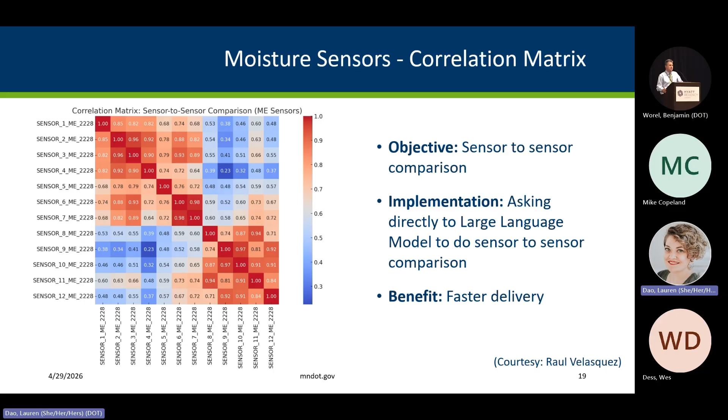By rigorous arithmetic, you can find out what the correlation matrix will be. These things get very complex when you have something like a 20 by 20 matrix, so we've been able to use artificial intelligence to accelerate that.

We've also used it in geospatial analysis, where we do semi-variogram analysis. In the semi-variogram analysis, we have the sill, we have the lag, we have the characteristics that give us your geospatial data set, and we found that useful when looking at the influence of the position of various things. It was NRRA, where they were looking at the effect of the distance from the actual point of measurement.

And then we also used it for design, for the influence of setting - I believe it had to do with strain. I can't remember exactly, but we did that at MnROAD. That paper was done by Khazanovich, but we didn't use large language models. That preceded large language models.

But right now, we are able to use large language models for geospatial analysis. And one thing I also do is ground truth validation - there's something called the confusion matrix, ground truth validation.

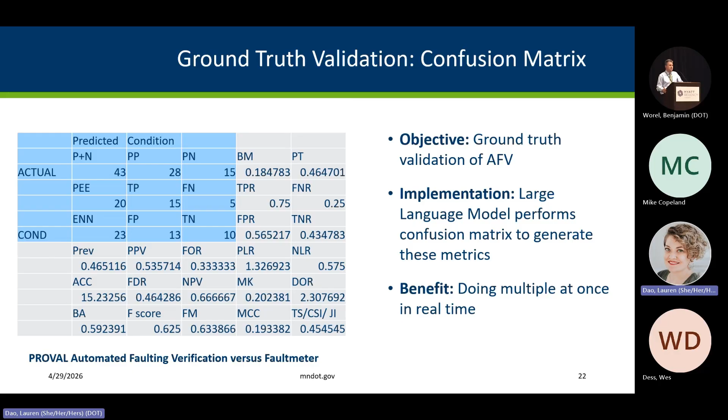Now, there are some national perspectives which I think I can mention. There's published data, a published report from NCHRP already that shows the implementation of machine learning in state utilities - NCHRP Report 112, you find that. And then I'm a member of an NCHRP task force on how AI can improve data quality.

Once we identify influential data, we can now ask whether the data point is an outlier or not. Now, let's not forget the person in the loop - in all these things, we are still master of the work. We train the model; we do well to train the model.

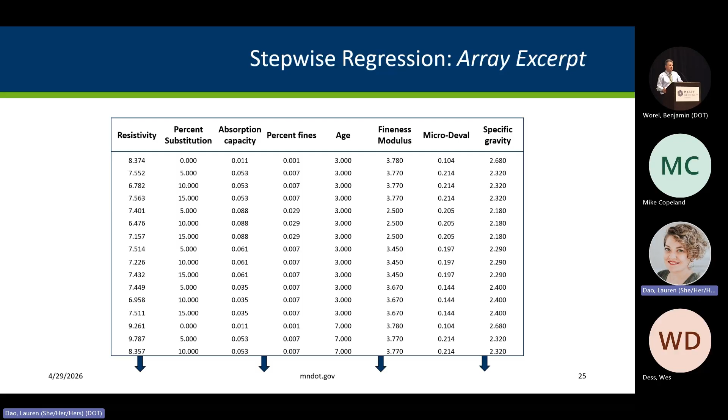Now look at this stepwise regression and the array - I wanted to do a stepwise regression. Look at the dependent variable, there is resistivity, and the independent variables are all the other variables in that array. Now, that's extremely long - it's not just what you see there, but just to show the array.

When I did this about six months ago, it actually identified all the starting variables as final variables. What a stepwise regression analysis is supposed to do is use the adjusted R squared, not R squared - R squared doesn't mean anything. The adjusted R squared is the one parameter that will not improve when you keep adding to the model. If you keep adding variables, it will look good, and people just dump all manner of things and say R squared is 0.85, 0.99. But you only want significant variables in your model.

Now, six months ago, I had a particular large language model, and it said that all the variables there were significant. That's how it solved the stepwise regression.

But I knew better. The person in the loop matters. If you have a situation where you just dump it on AI without actually having a large amount of what you're looking for, you have lost that person in the loop. You have lost control of what you have.

And AI can hallucinate. So these are the things. Just a few days ago, suddenly it had been trained, and now it gave a significant model which would run with what we calculated directly. So it's able to now do the stepwise.

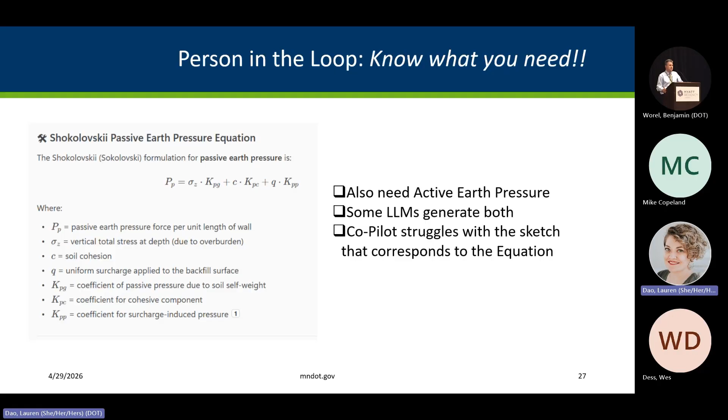But you have to train it and give it some more prompts and so on. So you cannot rule out the person in the loop. We have to know what we're doing when we're using AI. So with AI, there is responsibility, there are ethical issues, and generally there are issues with hallucination and all that, but avoid the situation.

I forgot to mention we started with Bayesian statistics, very vital. That's conditional statistics. There's the naive Bayesian in artificial intelligence, and in the naive Bayesian, you are assuming, you're telling the Bayesian that there is independence, that there is no conditional statistics. So it's working against Bayesian.

So it's a method used, for instance, your telephone identifies spam messages. It uses naive Bayesian, and it's able to say, well, this is a spam call, and so on and so forth. So those are little measures, but we have to fine tune them.

Another thing is the random forest. In random forest, what it does is take portions of the data and analyze the portions of the data. And in analyzing portions of the data, it now aggregates them, what they call bagging, aggregates the portions of the data, and at the end of the day, it gives you a model.